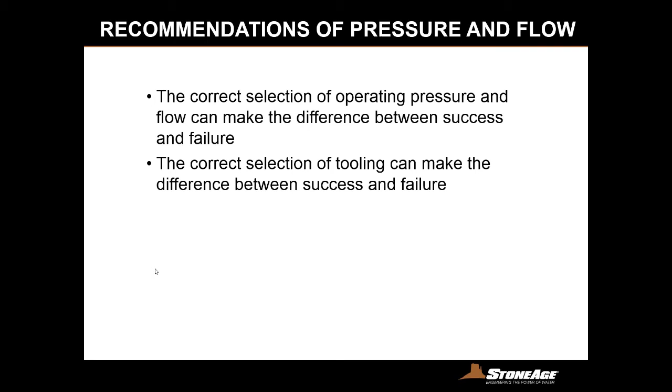So why does pressure matter? Well, every material has a certain threshold pressure below which water won't have an impact. I could take a fire hose out to a concrete pad and spray it all day, all week, or all month long and not do any damage to it. So I need to get my pressure up to a certain point where I start to affect that material.

This curve is an example for concrete, showing efficiency on this side, so more efficient means less energy. At 5,000 psi, it takes a whole lot of energy to just get into that concrete, whereas at 10,000 to 15,000 psi in this particular concrete, that takes the least amount of energy. Typically, the optimum pressure for any given material is in the range of 3 to 5 times the threshold pressure.

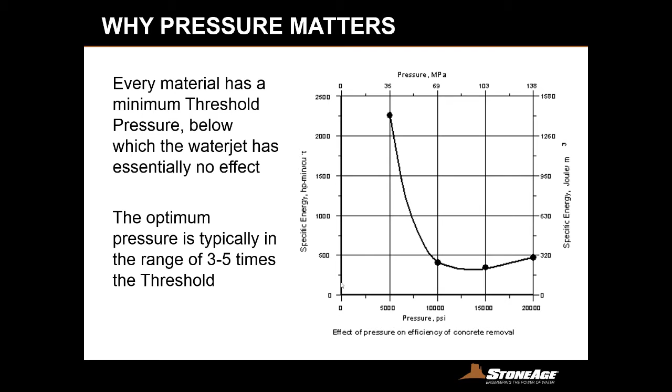And then why does flow rate matter? Well, if you've reached your optimum pressure but want to get the job done twice as fast, how can you do that? You could do it by increasing power through increasing pressure, but the ideal is to increase power through increasing flow rate. This shows an efficiency curve for a material by pressure. Increasing pressure here, going along the curve, improves my energy usage. I'm more efficient.

These red lines represent what happens at any given pressure as I start to increase my flow rate. So this is a line of pressure, and this is a line of flow, increasing flow at that given pressure. You can see it's not exactly linear or straight across, but it does effectively improve your removal rate to get the job done with the increased power applied.

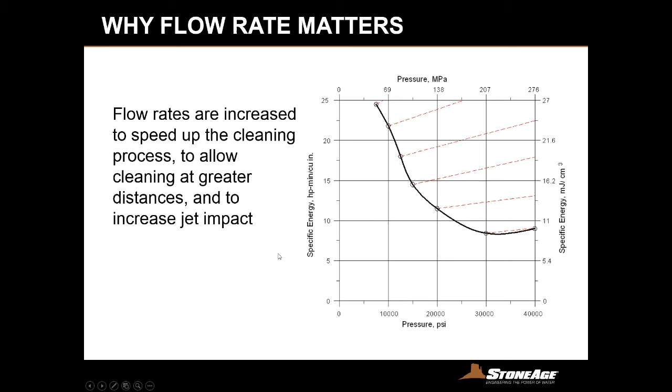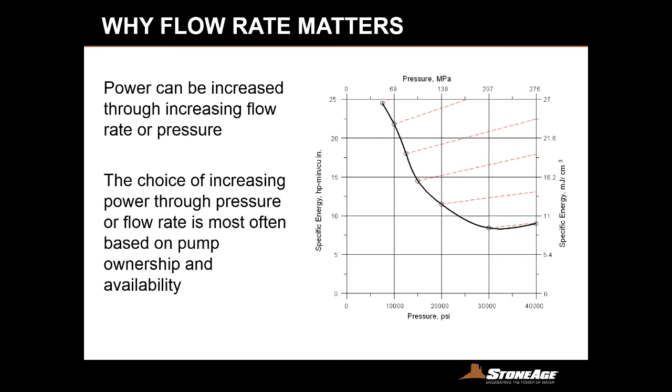So you can increase power through either increasing the flow rate or increasing the pressure, or both. Oftentimes it's dependent on what pumps you have. If I've got a whole yard of 20,000 psi pumps out there, it's likely I'm going to operate at 20,000 psi and just increase my power applied by adding more pumps.

Pumps can be operated together. You can manifold them together. This is 4 or 5 pumps tied together per system, and that allows you to achieve a higher flow rate at a given pump pressure.

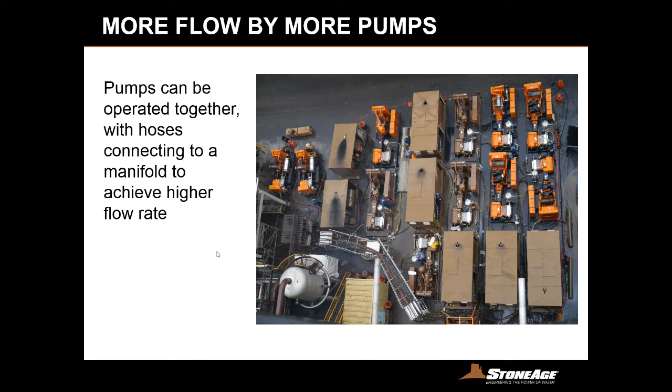There can sometimes be restrictions on increasing flow rate, such as water availability or means of dealing with that water. If they say, well, we don't want more than 20 gallons a minute going into this vessel at any given time, then you might be stuck with increasing your power through increasing pressure instead.

Higher pressure does bring higher operating costs and greater risk of damage to what's underneath what you're trying to remove, whether it's refractory or even steel. For that reason, the maximum operating pressure may be specified by the job to reduce this damage.

For example, if you're cleaning copper tubes, you're going to limit your maximum operating pressure because you can cut into copper tubing pretty easily with too high a pressure.

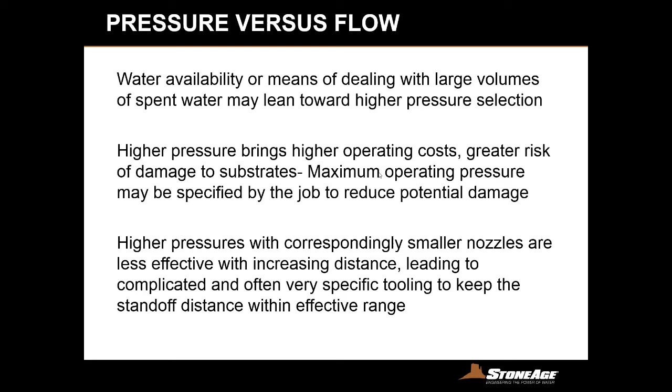The other part of going to higher pressure is that for the same power, your orifice sizes get smaller. And since the deterioration of a jet through air over standoff distance is proportional to the orifice size, that means if you're going to operate at a higher pressure for the same power, you may have to get much closer to the material to be removed, which in some cases can lead to more complicated and often very specific tooling, so you can get the jets close enough to be in effective range.

This is an example photograph from testing we did, and you can find the paper on this on our website for StoneAge.

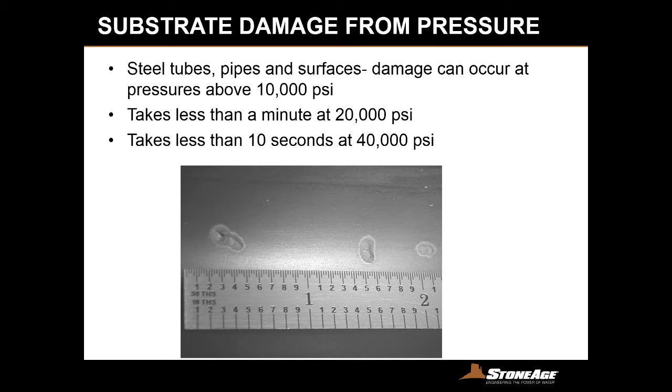It illustrates what a high pressure water jet can do, particularly if left stationary on steel. This was the inside of a steel tube, and it takes less than 10 seconds to do this amount of damage if you're operating at 40,000 psi in a steel tube, if you sit on it for more than 10 seconds. At 20,000 psi you'd have to sit there for about a minute, but still, if you're not paying attention and the tool's stuck and you're wondering what to do next, and you leave it at pressure, you can damage that steel tube. At pressures below 10,000, you're typically pretty safe. You can eventually erode steel materials, but it would take 10 minutes or more. You'd have to leave it in one place.

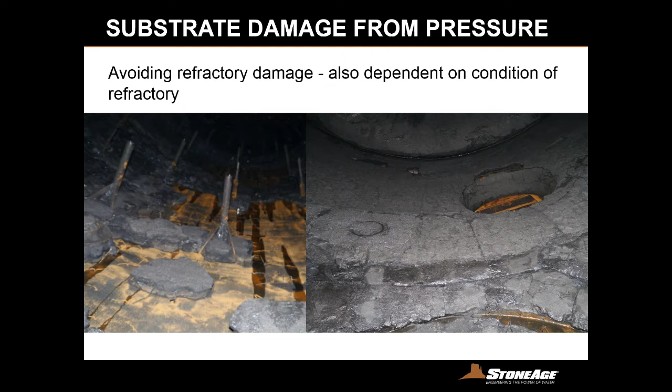This is an example of avoiding refractory damage, or not. On the right is intact refractory, and on the left was refractory that was actually in really poor condition. We were operating at a pressure trying to minimize removing refractory, but because it was so badly damaged, we couldn't help it. The hard part was when they came back and said, well, we want you to take out all that refractory. It's like, well, we're set up to operate at a pressure that hopefully does not damage the refractory, so that made it really difficult to actually try and remove it.

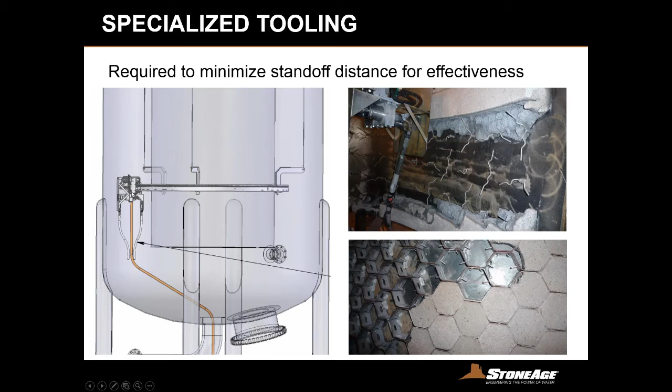This is an example of that specialized tooling. This was in refractory removal, where for this type of hex mesh refractory, you need to be typically within a foot of standoff distance. Up to 2 feet can be effective, but it takes like 4 times as long. So to be within a foot of it and to maintain the impact required to remove it, it can require some special tooling to hold the jets within that foot or less standoff distance.

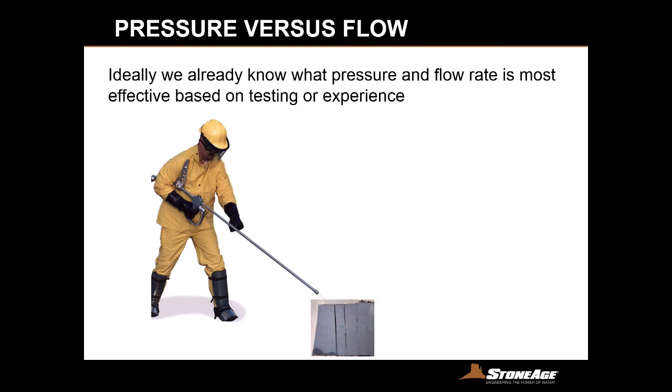Ideally, if somebody calls and says, I want to clean this tank, the first thing you ask is, do you have any idea what it takes to remove that material? Ideally you get the chance to test on a sample or have past experience that tells you, okay, last time we did this job at 8,000 psi and so many gallons a minute. Well, okay, I can work from that, and the next question is, well, can I do that same thing from 10 feet away or not? So first of all, we have to go through the whole pressure loss thing.

This is one of my illustrations I'd like to show, just showing what we're doing with a water jet. It isn't just magic. We're putting this much power continuously flowing out of a nozzle. But getting that power, getting that water to the nozzle, and still not losing all the power due to friction loss is important. As an example of why it matters, if you have a 2-lane highway filled with cars going 40 miles an hour, you can get 704 cars per minute out of town. To get the same number of cars in the same amount of time on a 1-lane road means those cars have to be going 80 miles an hour. And as we all know, it takes more fuel to drive down the road at 80 miles an hour than it does at 40 miles an hour.

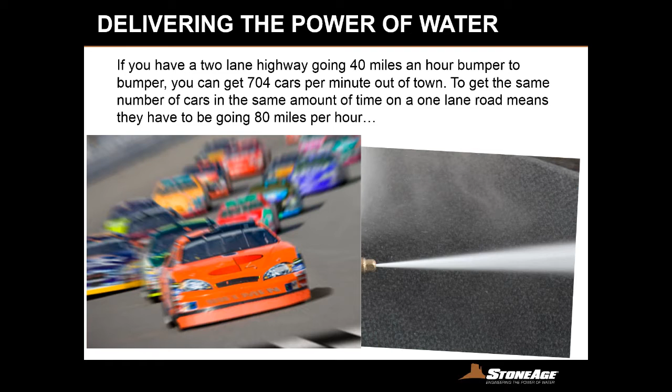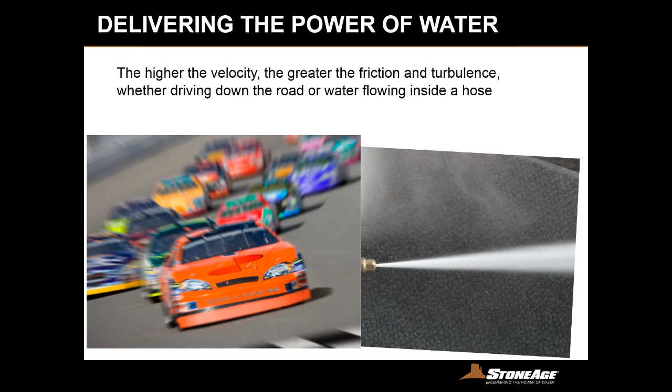That's due to the resistance of the wind and the tires on the ground and such. The same thing applies to water trying to flow through a hose. The higher the velocity of the water, the greater the friction and the turbulence, whether you're driving your car down the road or the water is flowing inside of a hose. So what do we do about managing this?

The effect of the inside diameter of the hose has the greatest effect. It's almost to the 5th power. This is the equation for pressure loss. You've got length, which is directly proportional because there's no power there. The effect of the flow is almost squared, it's to the 1.85 power. But as you see, the diameter is almost to the 5th power. So that is the strongest factor.

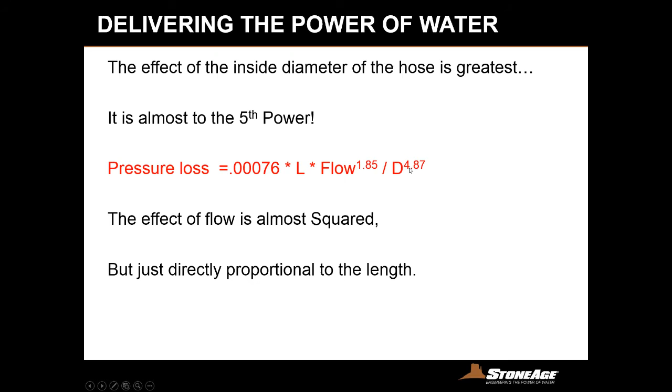Based on that, you should ideally use a bigger, larger inside diameter hose where possible. Particularly as a supply line, you may be limited because you're cleaning this small tube, so you can't stick a 1-inch hose inside a 1/2-inch tube. But getting from the pumps up to where you're cleaning the tubes, that's the place to use a larger supply line. You can also use 2 or more hoses in parallel where possible.

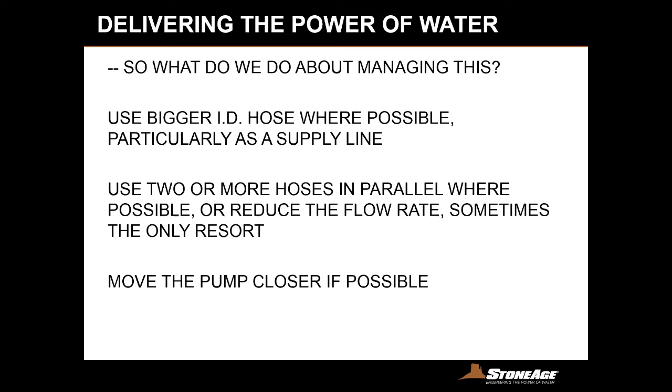Or again, back to the tube thing, you have to reduce the flow rate maybe because you're limited to a 4mm hose. Well, you're not going to put 50 gallons a minute through a 4mm hose. And of course, you like to have the pumps as close as possible to the job, which is managing the length of the hose.

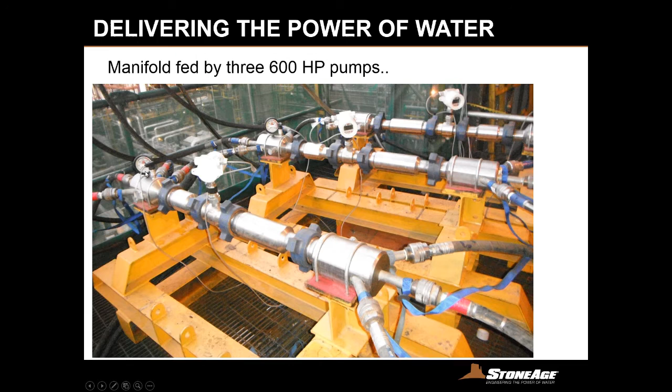These are going to go all the way up to the top of the structure. So here's your 4 1-inch hoses running up the structure to the top deck, to minimize that pressure loss getting up to where the tooling is going into the vessel.

Currently we're using 4 pumps tied together and 6 hoses up the structure on this particular job, and that's then supplied through a 1.5-inch hose to the tool on the end, doing 300 gallons a minute. And while we're operating 10,000 psi on the ground, through 400 feet of hoses, we're still maintaining 9,200 psi at the tool.

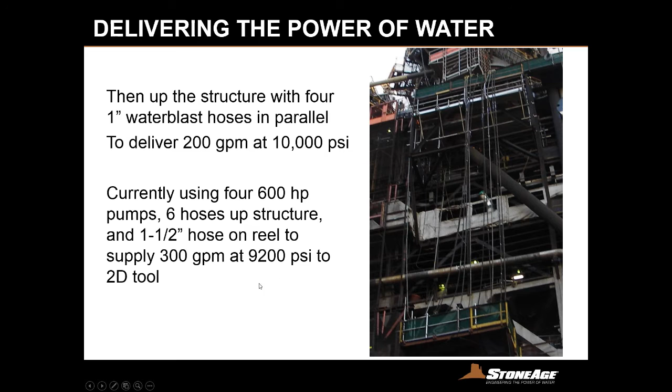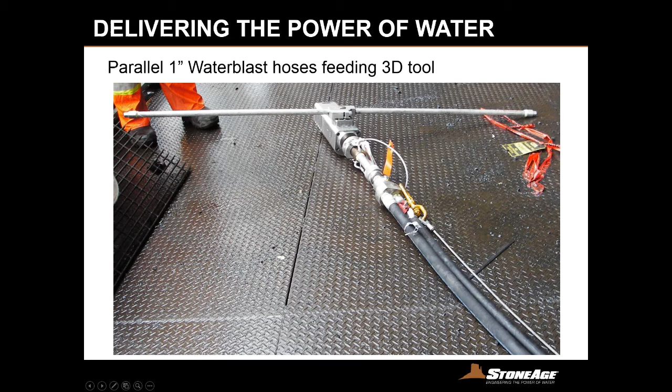This is an example of 2 1-inch hoses feeding a 3D tool, running about 200 gallons a minute, so each hose is getting about 100 gallons a minute through it. You do notice that if you're doing this with a 3D tool, a Y or a T manifold does not work, because your arms or jets will come around and hit your hoses. So they're a pain to put together because you have to stretch the hoses out, but it keeps them out of the line of fire of the jets when they're running parallel like this.

This is the big 2D tool that takes the 300 gallons a minute through the 1.5-inch hose on the reel.

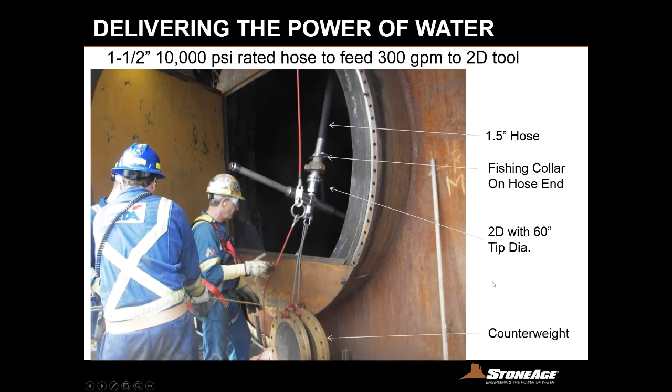So how do we calculate this pressure loss? Well, we've written several different calculators over the years, and we have a current very simple one I'll show you. You can also look in the back of your hose catalog. It'll give you the pressure loss for a 50-foot length of hose at a given flow rate.

Or you can always do a field measurement, where you run the pump at the RPM you'll be running at to produce the flow you'll be running at, with the hose and your system intact but without a nozzle on the end. Of course, make sure you hang onto the end of the hose or tie it down really well. Then your pressure loss through that system is what the gauge at the pump reads.

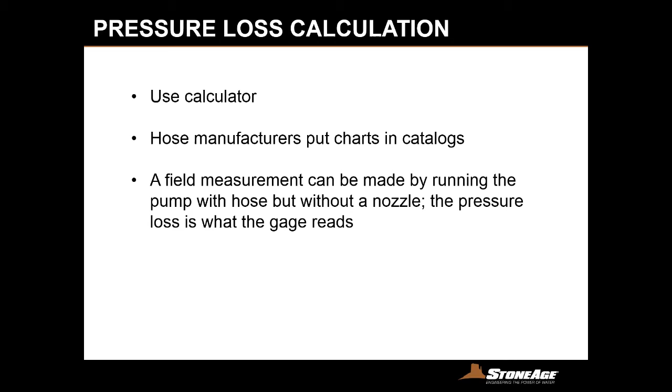This is an example of the calculator. It shows you enter the inside diameter of the hose, the length, and your flow rate, and that will tell you your pressure loss.

Now, the reason I did it this way is it does not matter what pressure you are at. It only matters what your hose size, length, and flow rate is. What matters is, okay, if my pressure loss is 2,000 psi, say, and I'm at 20,000 psi, that means I'm going to have 18,000 psi at the tool. Or if I'm at 10,000 psi, I'm going to be about 8,000 psi at the tool. That's where pressure comes into it, but for calculating pressure loss, it does not matter what pressure you're operating at.

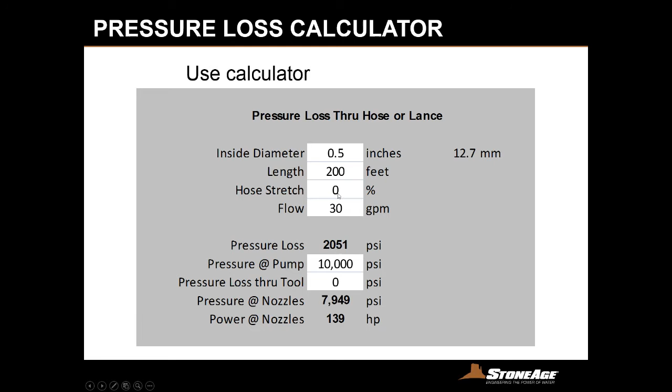So the example of using 2 or more hoses in parallel: again, the same case, a 1/2-inch ID hose, 200 feet long, putting 30 gallons a minute through it, you're going to lose 2,050 psi through that 200 feet of 1/2-inch hose. But if I divide that flow, 15 gallons a minute, 30 divided by 2 hoses, through that same 1/2-inch hose, 200 feet long, with 2 of them in parallel now, my pressure loss is only 500 psi.

That's the effect of flow being squared on pressure loss. And it's not that you add 500 plus 500 because you've got 2 hoses—no, it's like a parallel circuit. Your total pressure loss is still just 500 psi through those 2 hoses.

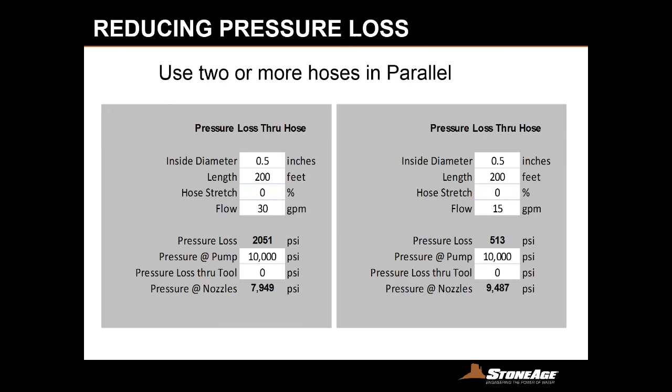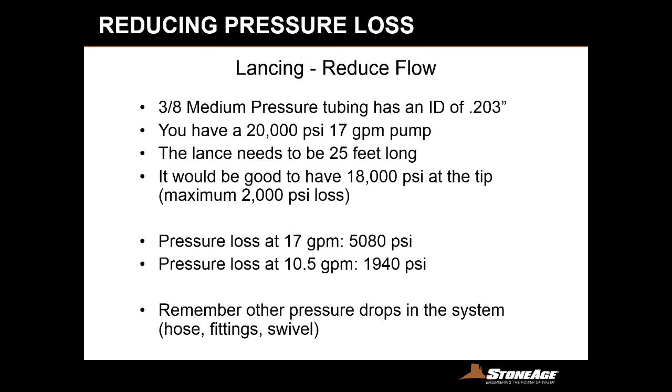Okay, I'm going to run through an example of using pressure loss calculation. I'm going to take my 0.203 ID tubing and say I've got a 30-foot long lance. Enter 30 feet long - since it's steel tubing, there's not going to be any stretch. Let's say I'm going to try and run 15 gallons a minute through that lance.

I would be losing almost 7,000 psi through that lance. So I don't want to say, okay, if I have 10,000 psi at the pump, that leaves me with only 3,000 psi at the nozzles. Or if I had 20,000 psi at the pump, that leaves me with 13,000 psi at the nozzles. Again, I want to get down to about 18,000 psi at the nozzle, so I'm going to start reducing my flow until I get there.

Let's try 12 gallons a minute - that reduced it to 4,500 psi loss, so I'm at about 15,000. But I still want more pressure at the nozzle, so I'm going to reduce that flow again. Let's try 10 gallons a minute - and I'm at 17,000 psi now because I have about 3,100 psi loss.

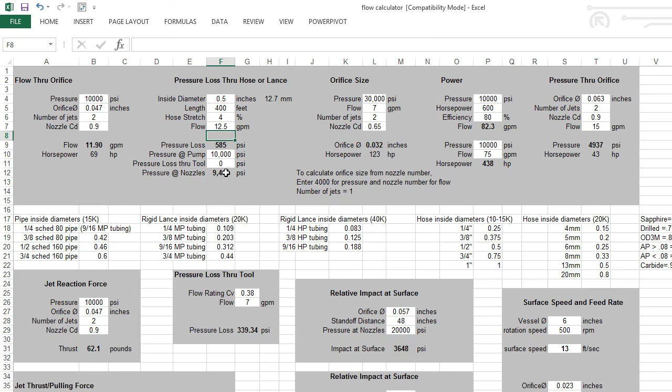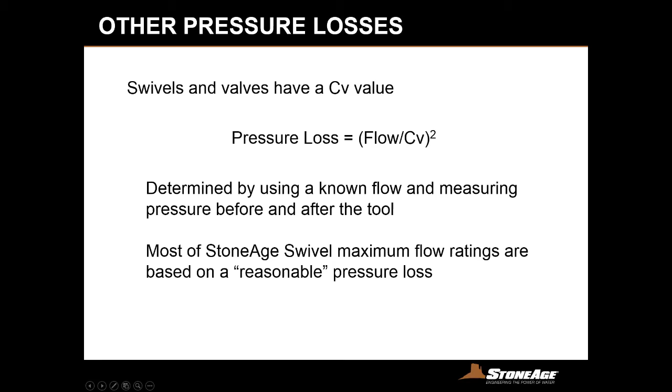Swivels and valves have a pressure loss associated with them as well. For that, we measure, we go out and physically measure the pressure drop across a given swivel, and from that you can come up with a CV value for any given swivel. If you look in our catalog, you'll see that for a BJV swivel, it's got like a 4.6 CV. This is how you use it: you take your flow rate divided by that 4.6 and square it, and that would be the pressure loss through that swivel. We'll go back to the Excel here real quick because it's on there too.

So say I've got my BJV, I know it's got a 4.6 CV, and I'm going to try to run 100 gallons a minute, which is what we say a BJV can do, I believe. At 100 gallons a minute, that BJV swivel will lose 472 psi through it.

Most of our flow ratings that we give for our tools are based on a reasonable pressure loss, typically around 500 psi. In some of the smaller seals, like in the Barracuda, that is actually a physical limitation. If you try to put more than 15 gallons a minute through a Barracuda, the water flowing through that seal is going to grab it and suck it down and try to shove it through the nozzles. But for most of the bigger seals, it's just saying it's a reasonable pressure loss.

I know I can run 120 gallons a minute through a BJV, that same tool, but I'm getting up there though - I'm getting up to like 700 psi loss. So the 100 gallons a minute, 110 gallons a minute, was chosen based on a reasonable pressure loss.

Let's look at a Barracuda, which has like a 0.43 CV, I believe. Obviously I'm not going to get 120 gallons a minute through it - it'd take 78,000 psi to do that. But at our 12 gallons a minute, we're losing about 800 psi. That's typically the maximum flow we say for a Barracuda, and oftentimes you're more around the 8 to 10 gallons a minute range. So at 10 gallons a minute, you're losing 540 psi through that Barracuda.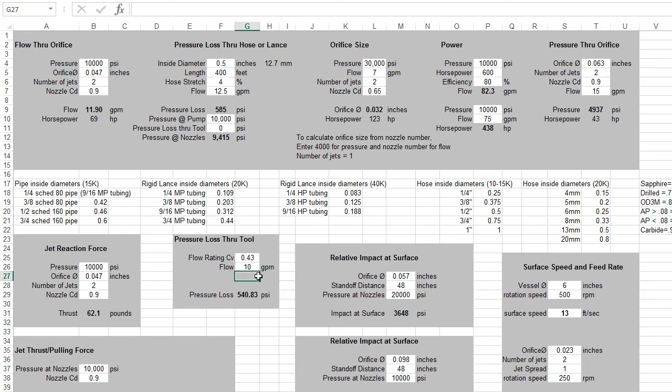So then what else do we have to deal with to determine whether or not we can do this job? Now we know that a jet, as it travels through air, loses power, loses impact force. So what can we do about that? Can we calculate it? Yes, actually we can.

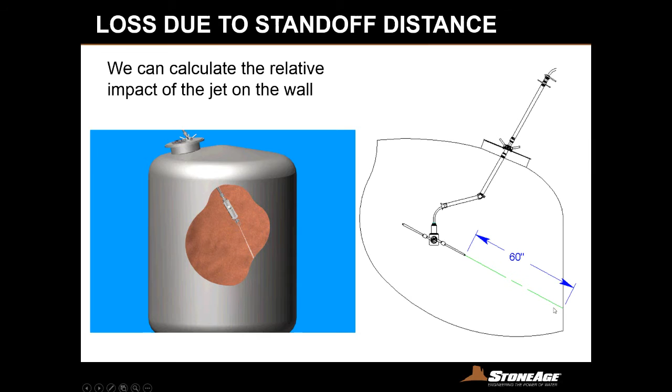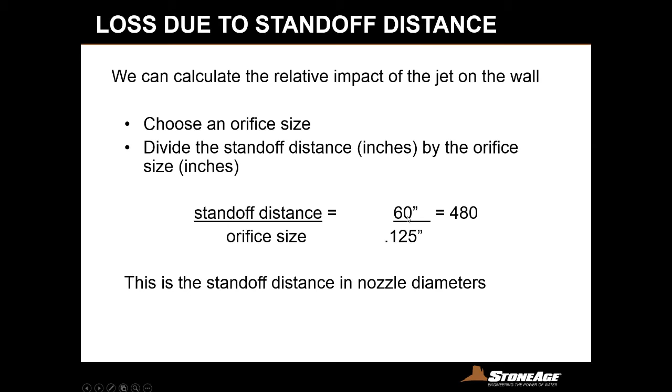Say I want to clean this tank with a 3D tool, and my standoff distance is going to be 5 feet, or 60 inches, away from the wall at the maximum. Can I calculate how hard I'm going to hit that wall? So we can calculate the relative impact of the jet on the wall. We need to choose an orifice size, in this case a 1/8 inch nozzle, at a standoff distance of 5 feet away, 60 inches. That distance in terms of that nozzle diameter is 480 times - 480 times a 0.125 nozzle is 60 inches. So that is my standoff distance in terms of nozzle diameters.

Now we can go out and measure the impact, relative impact of a nozzle with increasing standoff distance. This is an example of 2 different nozzle types under 3 different conditions. The best nozzle we called 100%, and at a standoff distance of 500 diameters, under those upstream conditions, I'm still going to have about 60% of my impact left over at 500 diameters away. At 1,000 diameters away, I'm just under 40% impact.

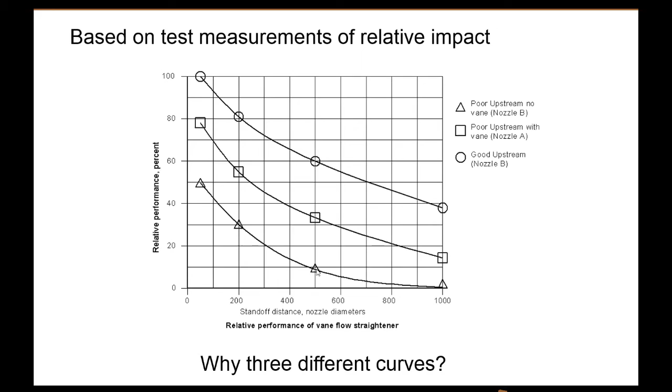If I take that same nozzle, that's the difference in these 3 curves here. With poor upstream conditions on that same nozzle, even up close I'm already down to 50%, and at 500 diameters away I'm down to less than 10%. So what we mean by those 3 curves is taking the same nozzle through a nice long straight feeder pipe compared to going through a tool like a pipe cleaning tool, a BJV, where water has to turn 90 degrees and come out radially. That's pretty poor upstream conditions versus good upstream conditions, where a straight flow path straightens it out and reduces the turbulence.

So here's the same nozzle again. Good upstream, nice conditions feeding the nozzle - that's our 100% performance. With standoff distance at 500 diameters away, we're down to 60%. Now I take that same nozzle and put it in poor upstream conditions, and at 50 diameters away it's already half the impact performance of the same nozzle with good upstream. Again, at 500 diameters away it's down to 10% impact relative to the best performing condition. So comparing at 500 diameters away: good upstream gives 60% impact, poor upstream gives 10%.

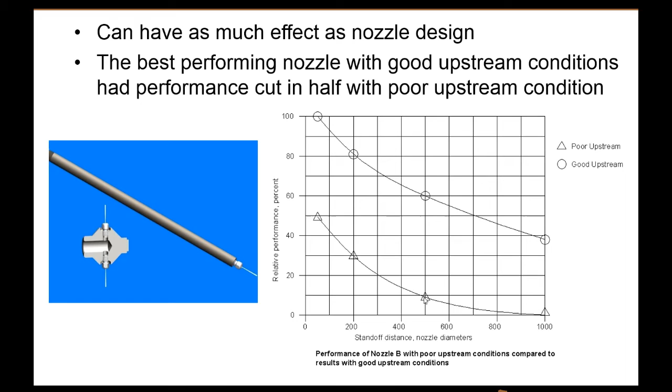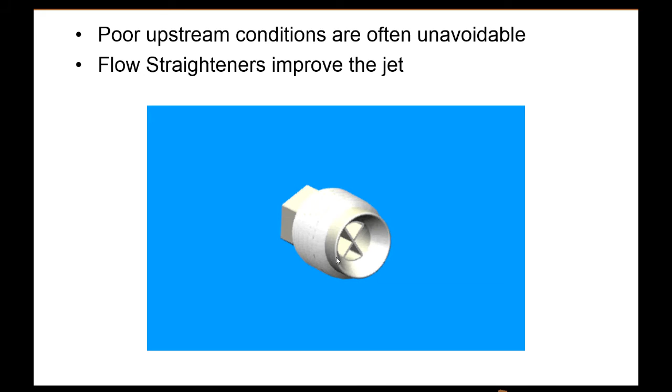So that third curve in between those two, what's that from? Well, that's from putting this little flow straightener in the nozzle. That's not something to filter out dirt - it's actually this little vane thing in nozzles that straightens the flow. That's what gives you this middle curve. You can take poor upstream conditions with the same nozzle that's at 50% of the best, and putting in that little flow straightener brings you back up to 80% of the performance up close, and at 500 diameters away it brings you back up to about 35% of the performance.

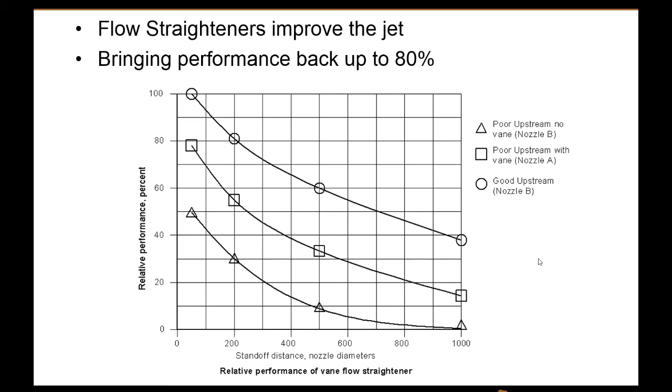One thing we do know is that putting a flow straightener in with good upstream conditions can actually inhibit performance. So there are certainly ways of reducing the standoff distance, like using extension arms and a tool such as a pipe cleaning tool. But not only do those extension arms reduce the standoff distance, they also serve to improve the upstream conditions. So you can gain a multiplying effect really, because you're getting closer but you're also improving the upstream conditions to improve the quality of that jet and thus its impact.

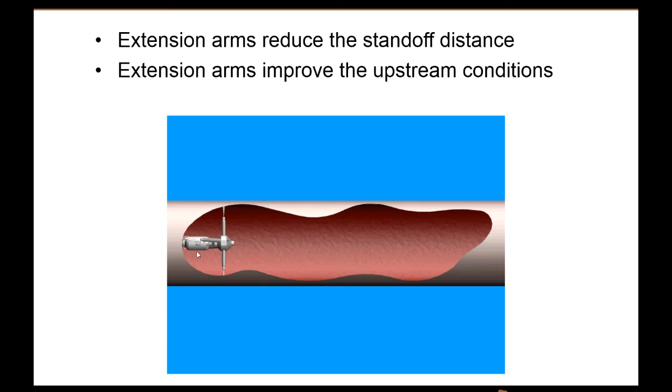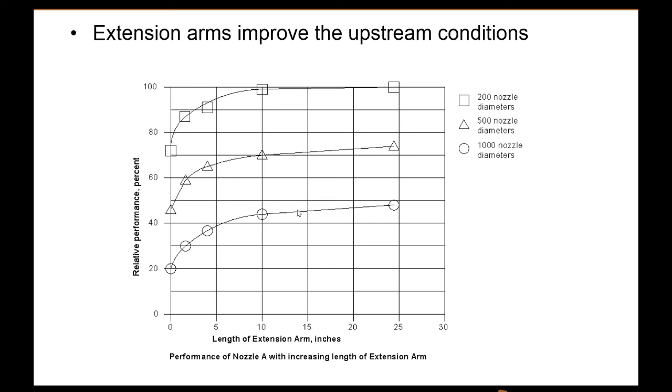This is the effect, even with the shortest extension arms. This is with 3 different standoffs: 200 diameters away, 500 diameters away, and 1,000 diameters away. You can see even using a 2-inch long extension nipple will improve your performance at 200 diameters away from about 72% up to about 84%. Once you get up to about 10 inches long, I'm almost to 100% at that standoff up close. At my bigger standoff distance, 1,000 diameters away, I have to keep increasing that length, and I can still expect improved performance at the bigger standoff distance.

So then, to use this as a calculator, we can write an equation based on these curves, and then we can just type it into the calculator and it'll tell us what our relative jet impact is.

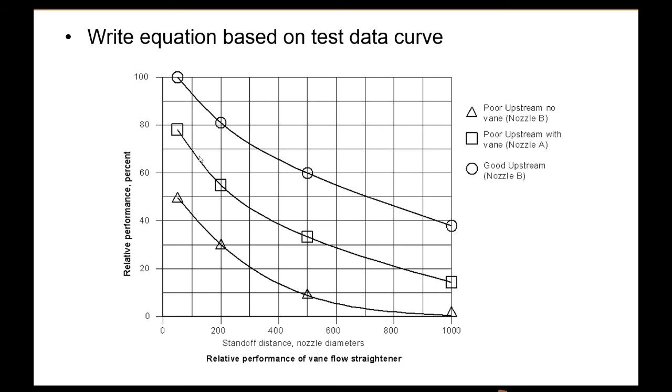So back to our spreadsheet, this is an example from it. I can take an 057 nozzle at 12 inches away, and if I've got 20,000 psi getting to the nozzle, my impact at the surface will be equivalent to 11,000 psi. I can compare that then to maybe an equivalent horsepower at a lower pressure, which would then be a larger nozzle. I've got 10,000 psi through an 098 nozzle at 12 inches away, and my relative impact at 12 inches away will be equivalent to 6,500 psi. So in this case, I would have more impact out of the 20,000 psi 057 nozzle than I would at 10,000 psi through an 098 nozzle for the same distance away, 12 inches.

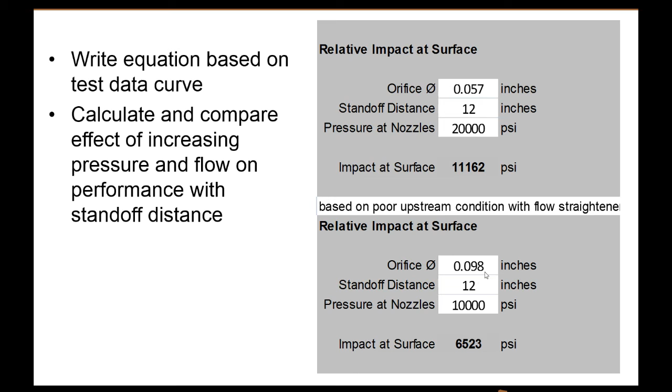We'll go back to the calculator here. So I want to compare the same horsepower, of course. So I can come up here and say I've got 10,000 psi through an 098 nozzle, and since typically you're going to be running 2 jets on a tool - it's rare to run one if you're trying to clean something like a tank, with a 3D nozzle - so I've got 2 nozzles, 098s, that's 300 horsepower.

20,000 psi through an 057 nozzle, 2 of those, that's actually a little less horsepower, so still about 300 horsepower through. So yes, we are directly comparing the same horsepower at 20,000 psi versus 10,000 psi.

At 48 inches away, at 20,000 psi through an 057 nozzle, I've got an impact at the surface of 3,650 psi. And at 48 inches away with 10,000 psi through an 098, we've got an impact at 3,400. Now as I get further and further away, they actually come closer together, but as you get up closer...

The 20,000 psi impact will increase dramatically relative to the 10,000, because I've got 10,000 more psi at the nozzle. So 12 inches away, I've got 11,000 impact with 20,000 at the pump, and 12 inches away here, I've got 6,500 psi.

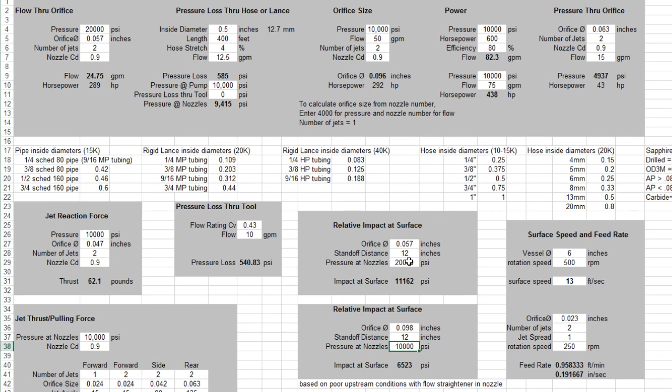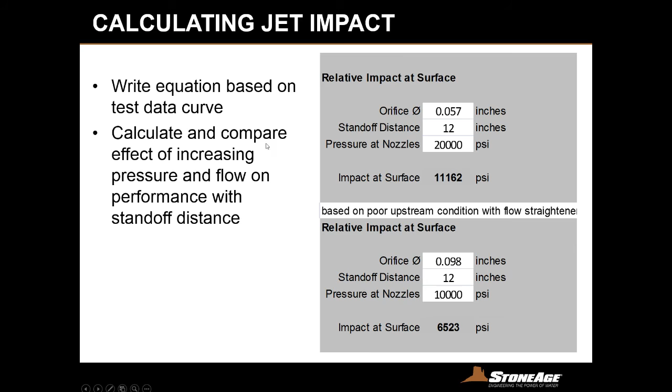This calculator, the curve used for it was the poor upstream condition curve, which, remember, was the middle curve on the three curves. Other things we can calculate are...

How fast should the tool rotate, or what is our surface speed. If I put a tool turning 300 RPM into a pipe, how fast is that jet moving across the surface? Say I've got a BJV turning 200 RPM in an 8-inch inside diameter pipe, I'm going to have a surface speed. That jet's going to be moving across the inside wall of that pipe at 7 feet per second.

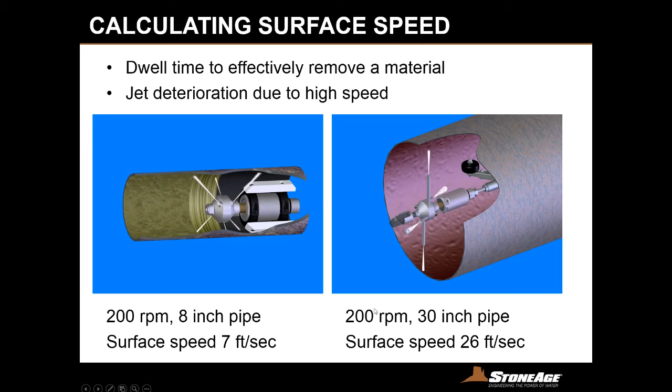If I take that same BJV with fast fluid turning 200 RPM and put it in a 30-inch pipe, it's going to be moving at 26 feet per second. It really becomes important if you're looking at great big diameters such as tanks and vessels and stacks, where, like, 15-foot diameter in this case, to get, based on the material I'm trying to remove, I want to be moving at about 20 feet per second across that surface.

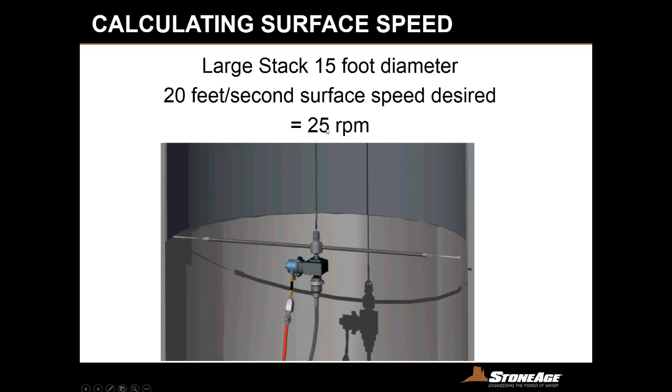I want that tool to only be turning 25 RPM. Again, we can go back to our calculator. Let's say for our 6-inch or 8-inch diameter pipe, and say I got a 300 RPM BJV, I'm going to have 10 feet per second.

If I put that same tool inside of a 4-foot diameter tank, we'll be moving 60 feet per second. So if you think about that relative to, like, if you had a shotgun and you're hand-holding it, how fast, 60 feet in a second, that's really getting with it.

Now, we've also tested, and we know that a jet does deteriorate just as it deteriorates through distance with standoff. If you move that jet too fast through the air, it will also take away from the power of that jet. And typically we try to limit things to below 50 feet per second.

That's where the curve kind of really went south on us for deterioration. But again, it can be based on the material. Like for coke removal, we know based on experience we want to be moving about 20 feet per second, because that's the dwell time we need to effectively impact that material to break it up.

So in the case of, say, a coker that's 20 feet in diameter, 240 inches, and to get my 20 feet per second, I don't want to be turning 300 RPM, obviously. 30 RPM is about 30 feet per second. 20 RPM should give us about 20 feet per second. So I know cleaning this 20-foot diameter thing, if I want to be moving at 20 feet per second, I need to have a tool that I can rotate at 20 RPM.

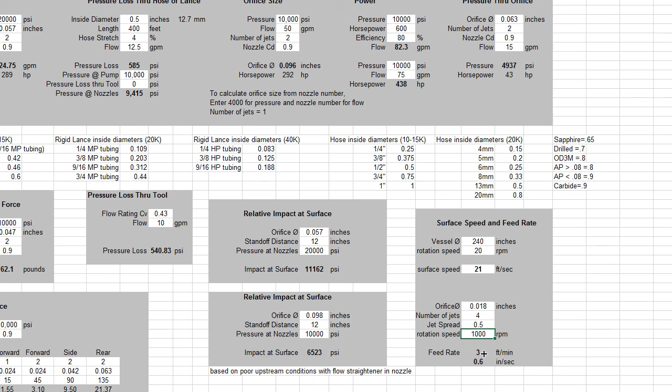Or if I say my jet's actually effective at 4 times its diameter, that's again going to effectively double my feed rate. Or if I know I really want to hit everything really hard, like hit everything twice and make sure I'm getting it, I can put in a 0.5 for my jet spread, which is effectively hitting everything twice, and that means a feed rate of 3 feet per minute, really slowing it down.

We do this for concrete as well, and then you decide, okay, I'm going to run 600 horsepower on this particular type of refractory. And if I know a given volume of material, I can calculate the time using this factor. It's like a constant - my time in minutes is going to be the volume I need to remove, however many cubic inches based on thickness and surface area, times this factor, divided by the power I'm going to use, say 600 horsepower.

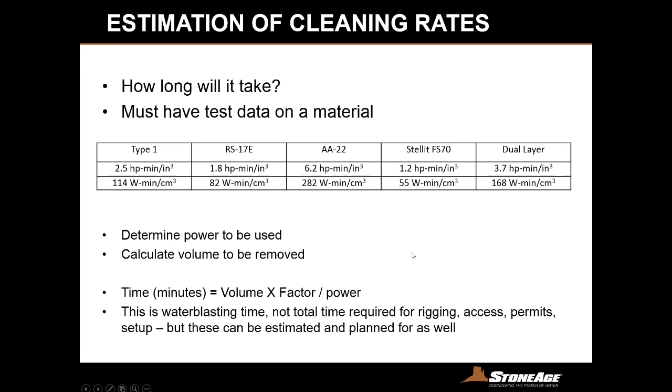That will actually tell you how long it will take to remove that material in actual running time, which can be as low as 10% of the actual whole time you're there. Anyway, it's a useful number for estimating and planning.

For that example, we were trying to run 3Ds the first time, which were limited to a maximum flow rate of about 200 gallons a minute with a loss of about 1100 psi. We came back with a 2D capable of running 300 gallons a minute with a loss of only 300 psi. So right there I'm applying a third more power with a third less pressure loss.

The other difference between a 3D and a 2D - if I'm trying to run in this large tank and it's so big I can only run near one wall at a time to be in effective range, well a 3D, because it sprays up and down and all around, is only making contact between 20 and 40% of the time the jets are within the effective range of impact.

A 2D in the same situation can make contact between 40 and even 100% of the time if you can put really long arms on it and put it down the center of the vessel. So all that adds up to at least 50% more time in range, and at least 70% more power applied with a 2D versus a 3D. That was a perfect example of how going in with the proper tooling can make the difference between success and failure.